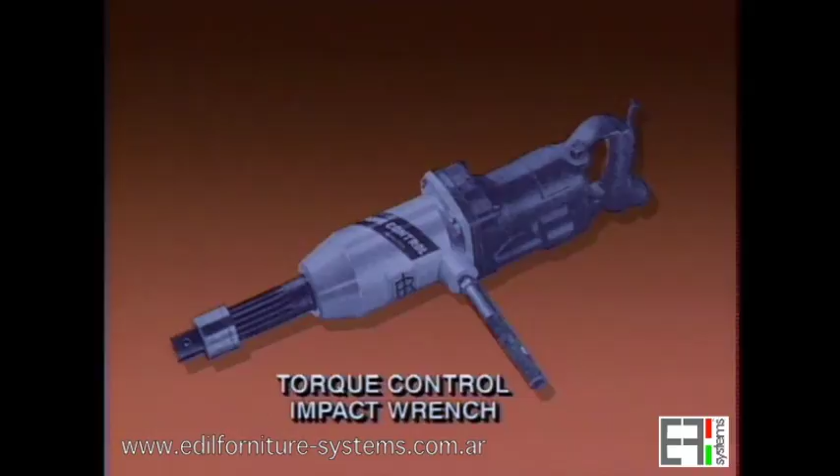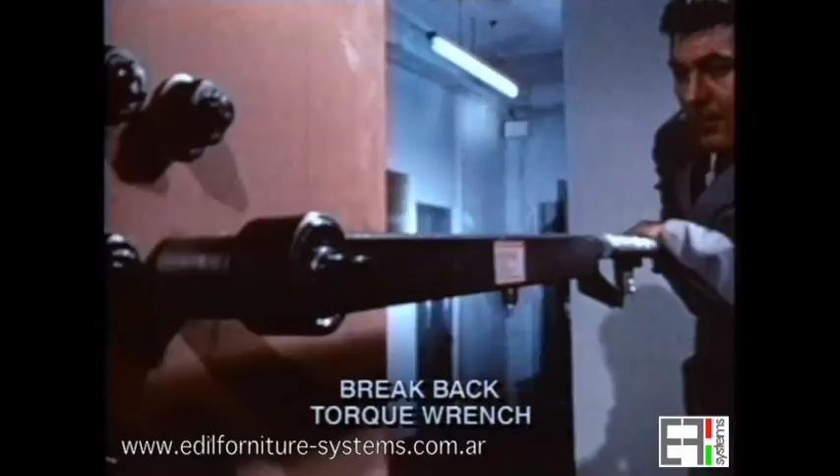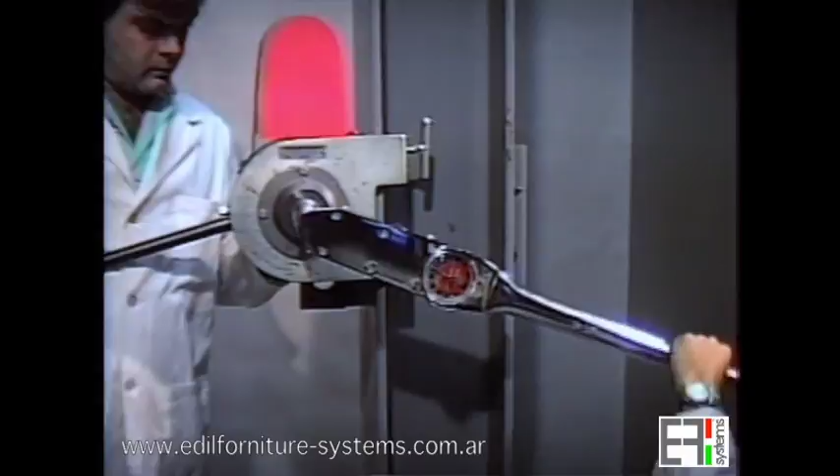Installation can be done by using a torque control impact wrench or by a twist-off bolt. Inspection is usually done with a dial gauge torque wrench or a breakback torque wrench, as used in certain parts of the world. On a simple torque wrench with a dial gauge, the operator watches the indicator needle move to a prescribed number of foot-pounds as the wrench is used to turn the nut on the bolt. When the operator reaches the number, he stops turning the nut.

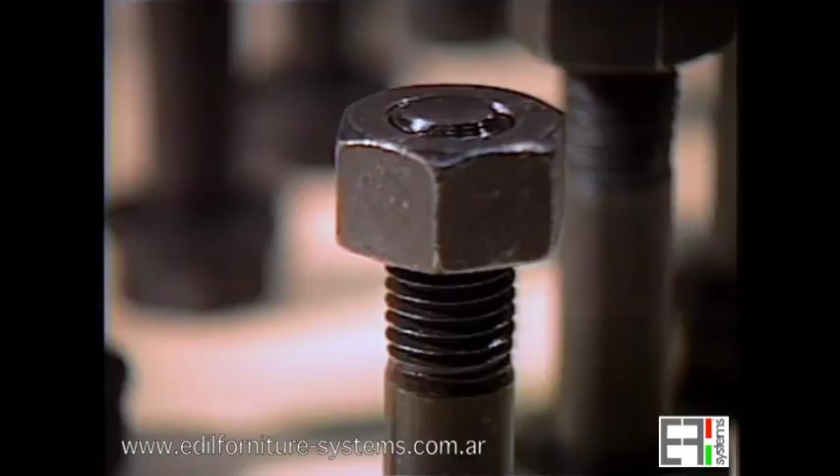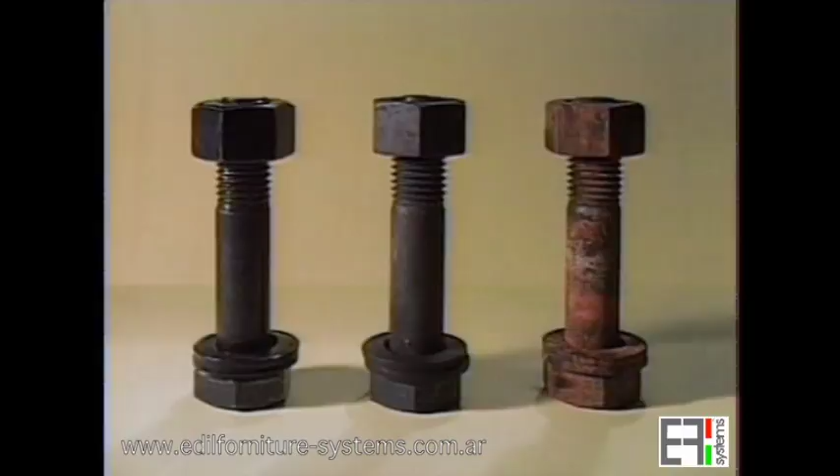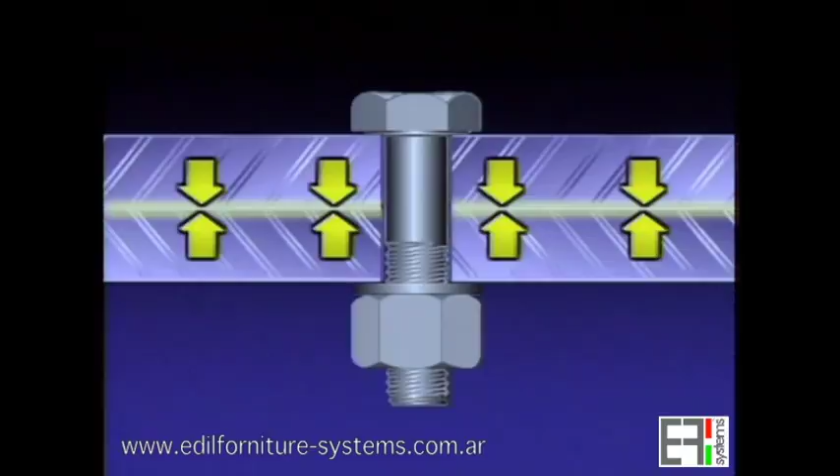To demonstrate the variable nature of the torque-tension relationship, we will use this lot of conventional 3/4-inch A325 high-strength bolts, nuts, and hardened washers. The lot is correctly manufactured. What differs is the condition of the bolts: lubed, dry, and rusty. The amount of clamp load or tension provided by the bolts will be measured by a Skidmore-Wilhelm bolt tension calibrator. Bolt tension or clamping force is measured in pounds or in kips, meaning thousands of pounds.

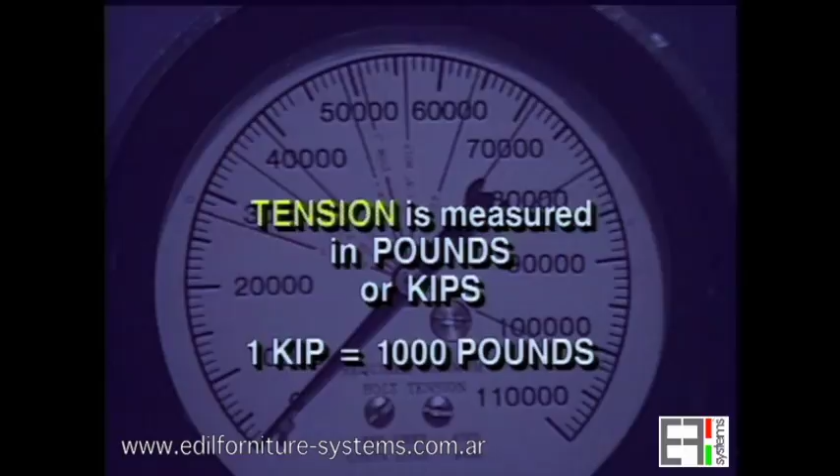A calibrated torque wrench is used to measure the torque or twisting force used in attempting to tighten each bolt. The question is, can proper clamp load be achieved using torque as a guide? We start with a well-lubricated bolt. The bolt is inserted into the bolt tension calibrator. Bolts of this particular size and type are designed to produce a clamping force of at least 28,000 pounds or 28 kips. A dial gauge torque wrench is used to turn the nut and tighten the bolt.

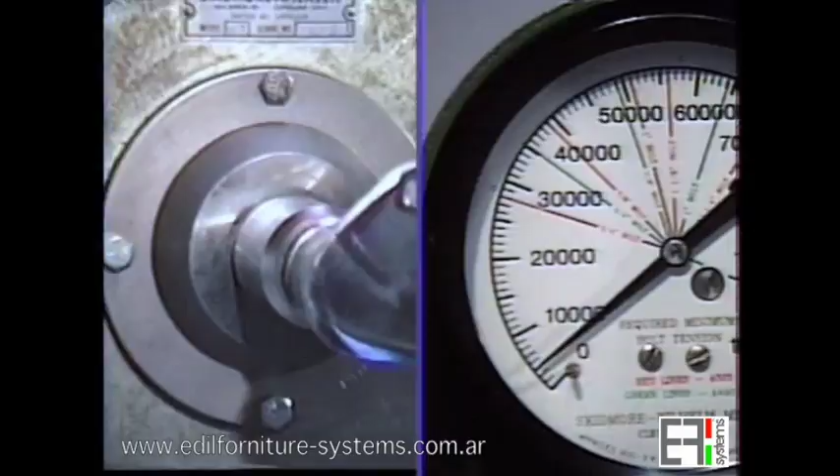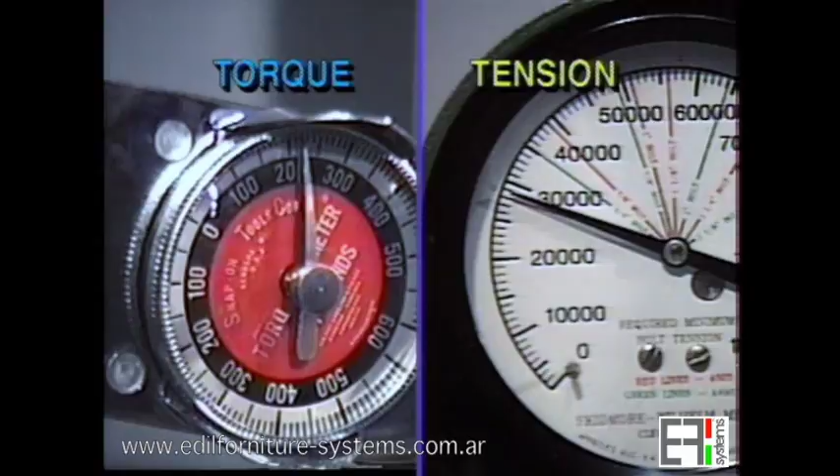The bolt is tightened to just over its minimum required tension of 28 kips, tightened to 29,000 pounds, requiring 220 foot-pounds of torque to achieve that tension. Therefore, the assumption is that 220 foot-pounds is the proper value to use as the torque to achieve or confirm at least 28,000 pounds of tension in each bolt. In actual practice, the average of 5 bolts is used to determine the torque.

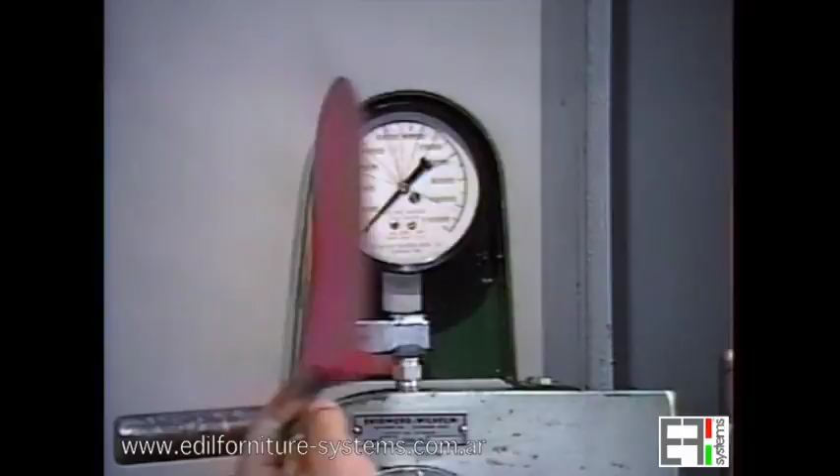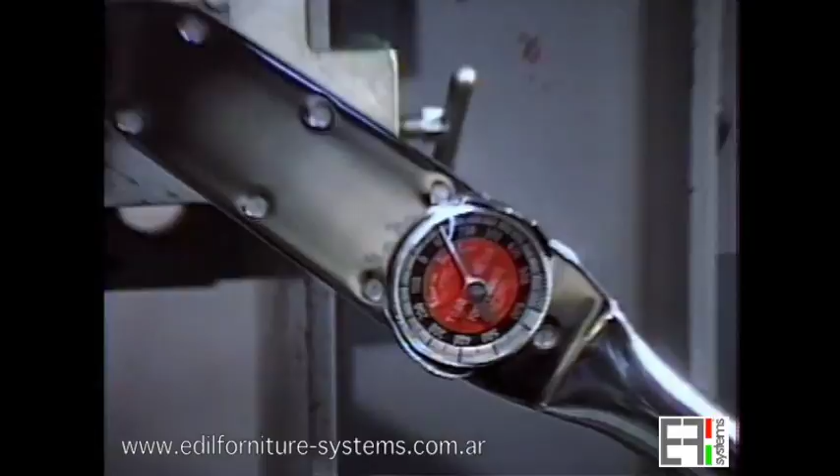Here is a second bolt from the same lot. The only difference is that this bolt is somewhat dried out and has less lubricant on it. Mechanically and physically, it is otherwise similar to the first bolt. The bolt is inserted into the calibrator. The tension dial is covered because in an actual connection on a job site, the installer's only guide is the torque indicator on the torque wrench. The installer applies 220 foot-pounds of torque, the same as before, and the resulting clamp load should be the same, at least 28 kips. Let's take a look.

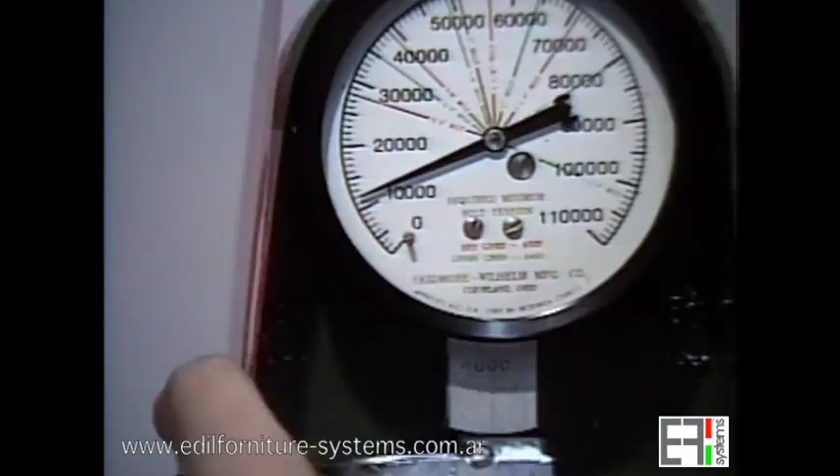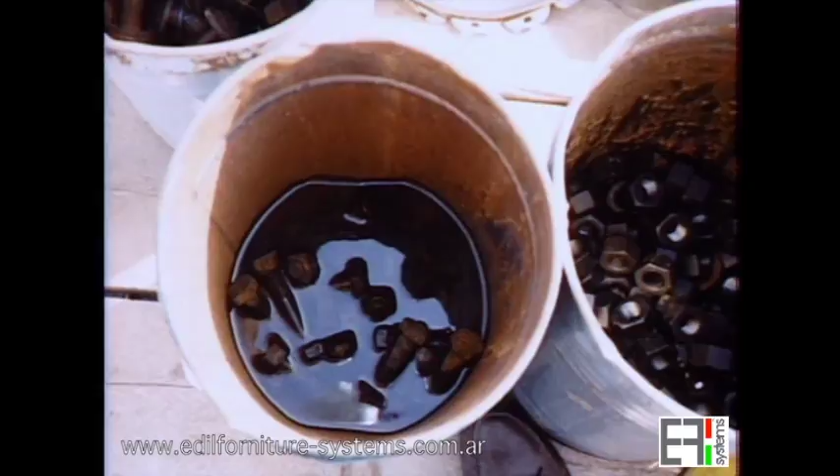We see there is only 12 kips of tension in the fastener, not the required 28. Even though the same amount of torque was applied, the clamping force is way off the mark. The situation is made even worse where bolts are allowed to rust, a condition all too common on many job sites. Here is a third bolt, a rusty one from the same lot. Again, 220 foot-pounds of torque is applied in attempting to tighten the bolt. Let's take a look. This time, only 6 kips of tension, where 28 is required. The effect of rust has again made reliance on torque measurement useless.

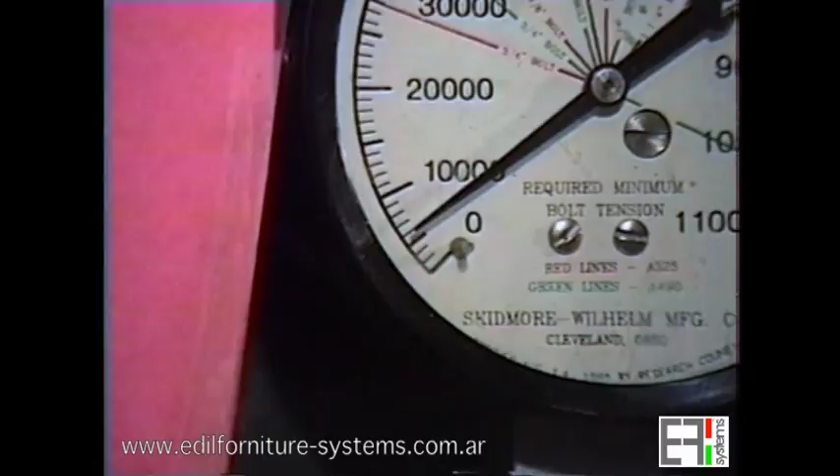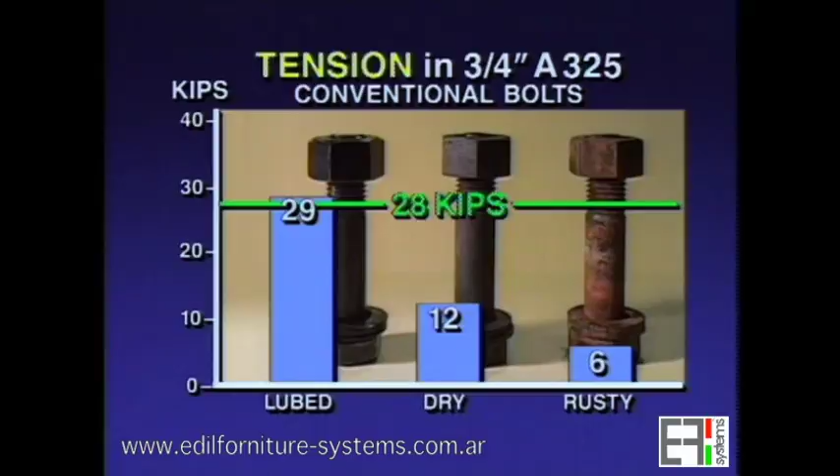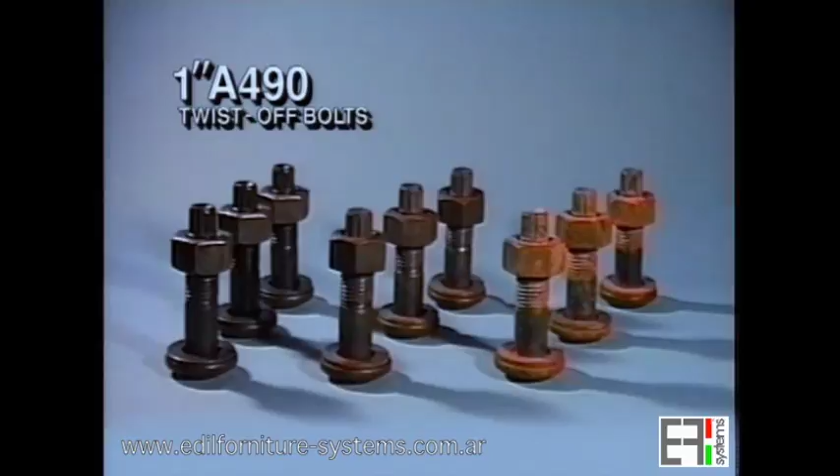To review, the lubed bolt developed a clamp load of 29 kips, the dry bolt a tension of 12 kips, and the rusty bolt 6 kips. Although the applied torque was always the same 220 foot-pounds, tension control bolts are also demonstrated. As before with the conventional bolts, these twist-off bolts have also been grouped by condition as lubed, dry, and rusty, representing the various conditions hardware is found in on a job site. The question is, how much tension will these big twist-off bolts provide when their ends shear off automatically?

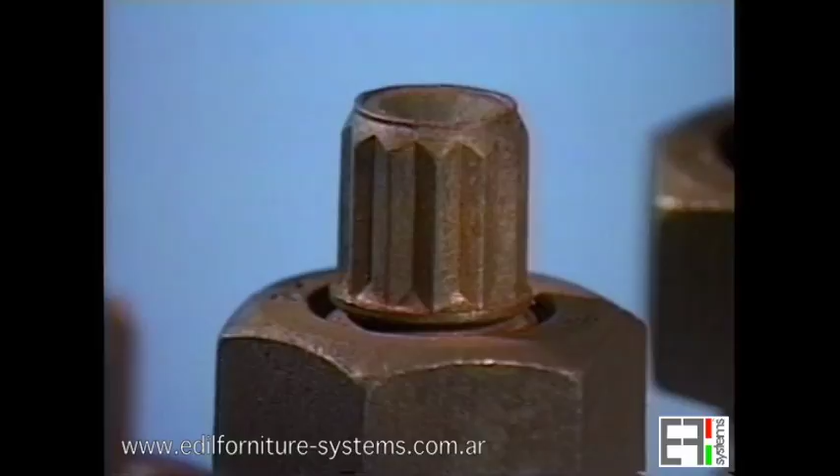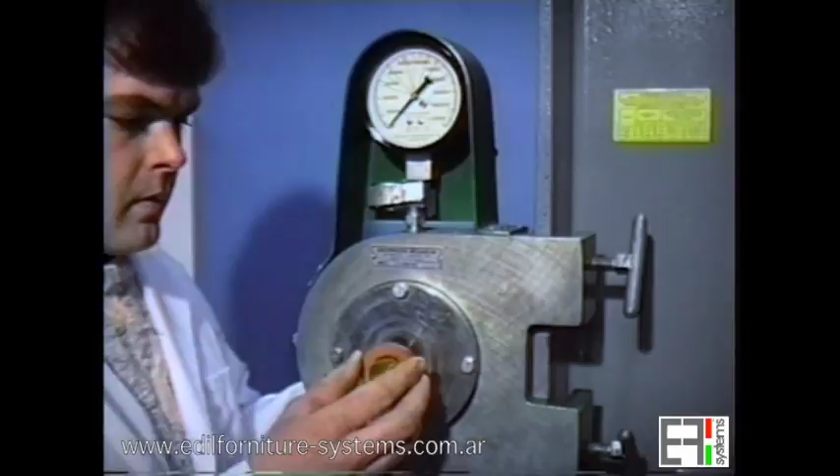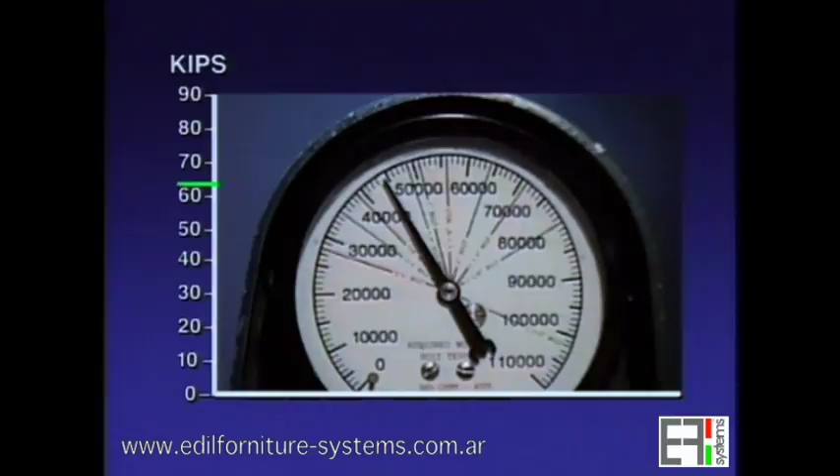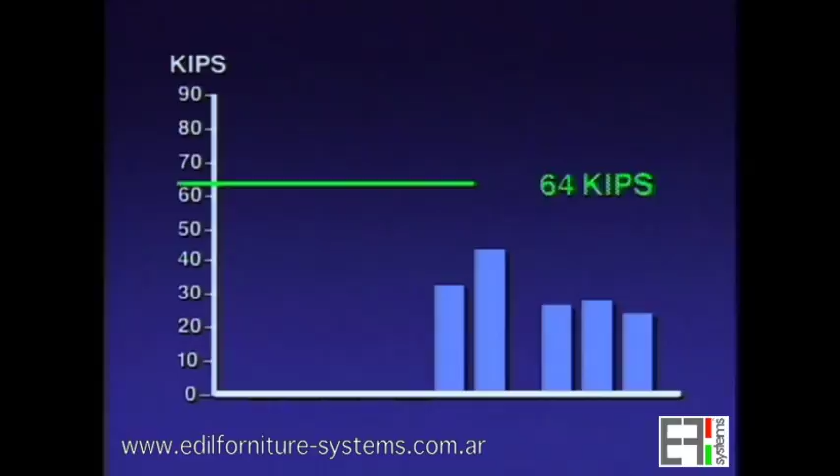1-inch A490s are intended to provide a minimum clamp load of 64 kips each. Let's try the rusty ones first, since experience has shown they'll probably be the worst. Here's the second rusty bolt. Here's a third rusty bolt. Will the clean, dry TC bolts do better? Here's a second dry bolt. And a third dry one.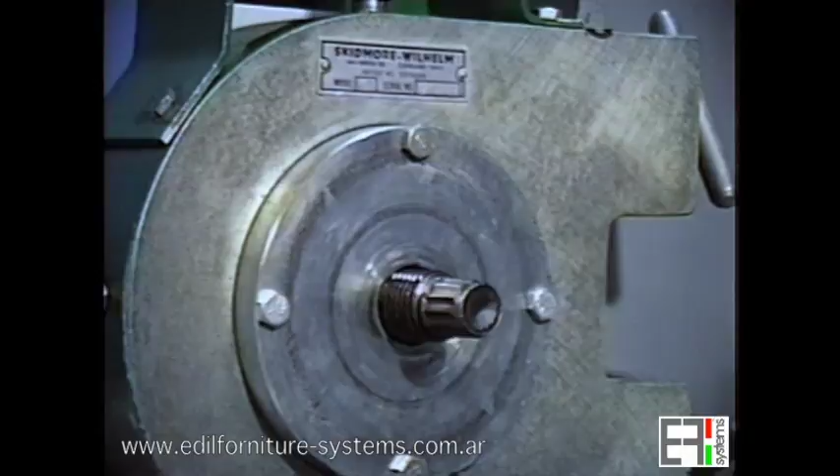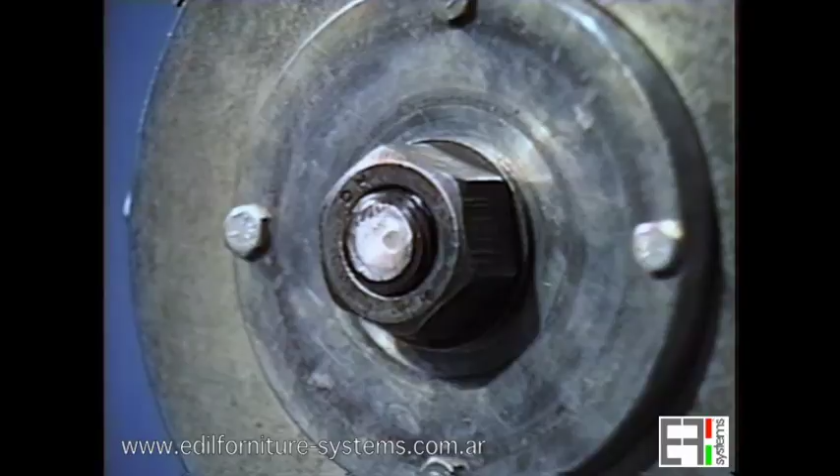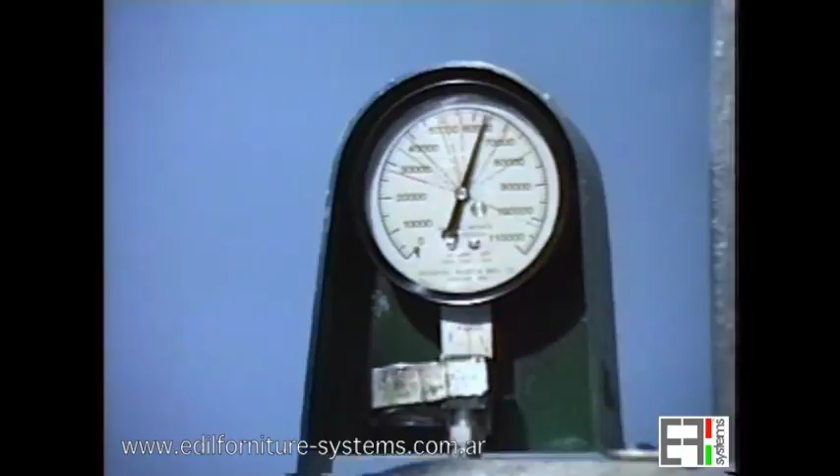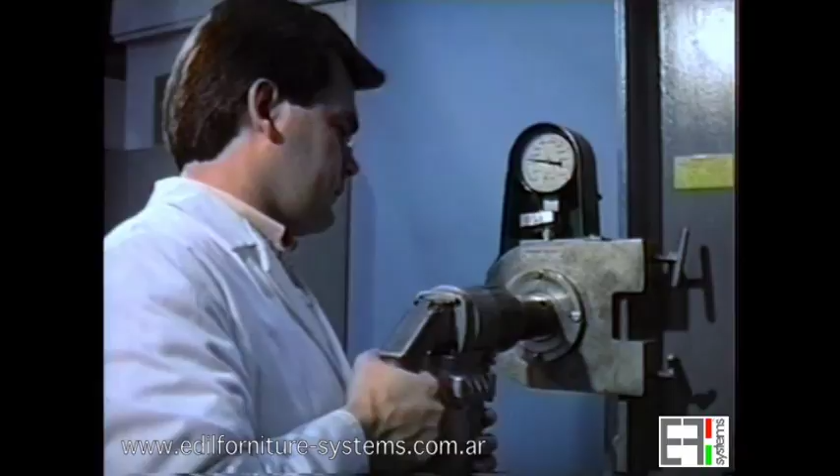Finally, the lubed bolts in their original as-received condition. Remember, we're still looking for at least 64 kips minimum tension. Here's the second lubed bolt. At last, we're up to tension. And the final lubed bolt. Wide scatter in this sampling, from 71 to 24 kips.

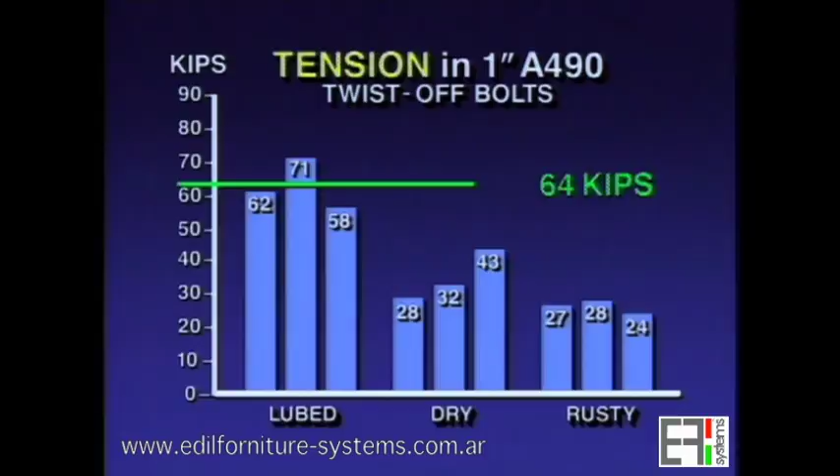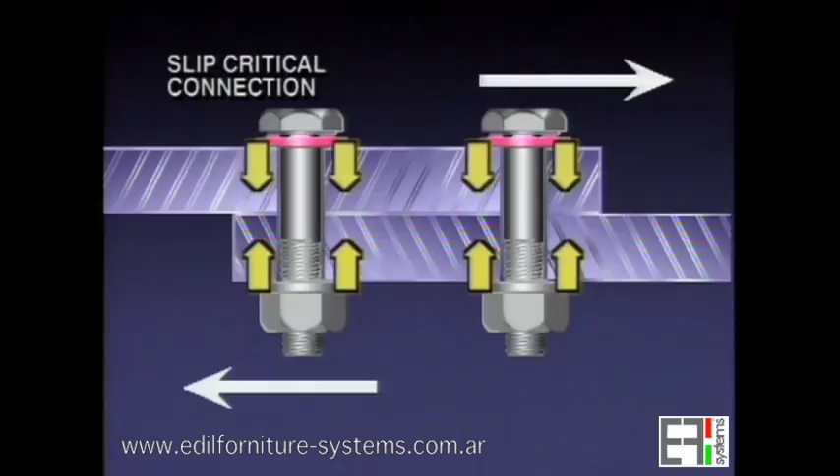Although some of the scatter is presumed to be caused by variation in the break-off torque of the spline end, the bigger problem here is as lubrication is reduced, the torque cannot be increased to compensate for the increased friction in the threads. The spline breaks off when it reaches a set range of torque values, whether the bolt is tight or not. Torque should, in our opinion, be avoided at all costs, particularly when using fasteners outside the factory environment. Let us again remind ourselves why proper clamping force is essential in all slip-critical connections.

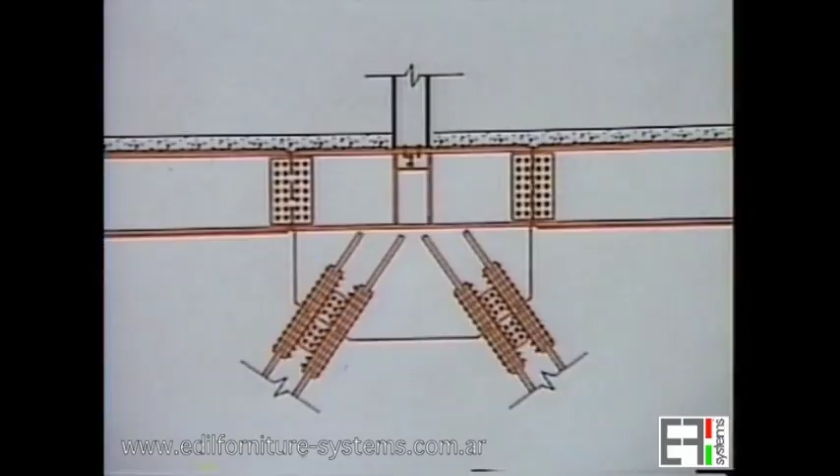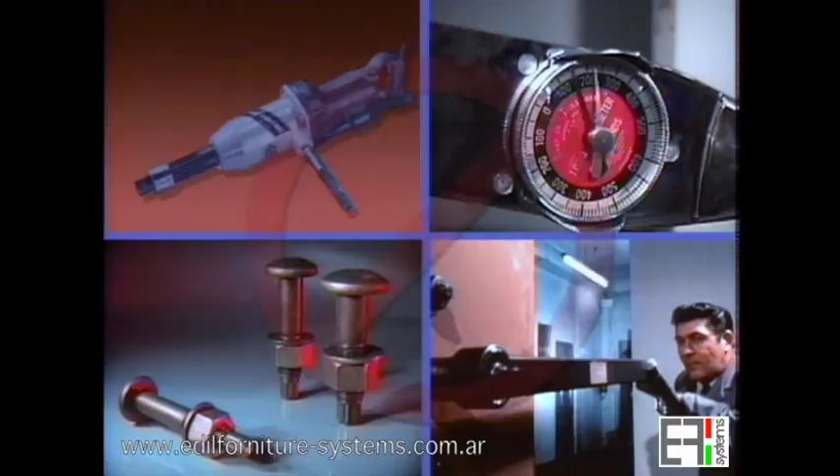One of the important things in a braced frame of this type is the connections between the steel members. If you look at this sample connection here, you have forces coming into that connection that can be between 1,200 or 1,300 kips to almost 2,000 kips. Now these loads have to be transferred from one steel member to the other, and basically it's done with bolts in this particular building. One of the problems that can occur in a bolted building such as this is that we design the connections assuming that there'll be no slip at the bolts, and it's known as, in a wind system like this, normally we'll use a slip-critical connection. Under no circumstance should torque measurement be relied upon to consistently produce uniform clamp loads that every bolt must achieve.